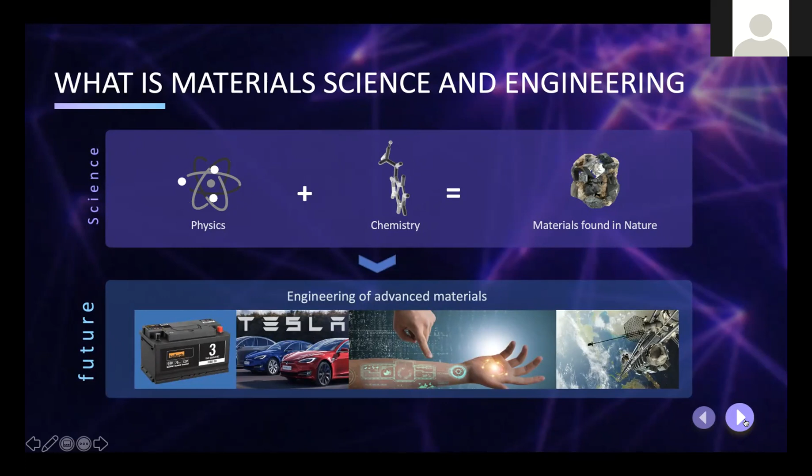In brief, in material science, we are interested in the processing of the materials, but of course, when we process the materials, the next step we should consider is the structure of the material that we produce. Then we use characterization techniques to study their properties and relate these properties to a given performance. That's what material science, in short, is trying to achieve.

For the next few years, what we are aiming for is to achieve flexible modules. Out of the entire curriculum, you have 25% meant for something that is unrestricted. What this means is that you are able to use about 10 modules to explore your own interests. It could be AI, computer science, or it could be business or economics. These are some highlights that we really want to showcase to all of you.

Okay, thanks, Vincent. Okay, yeah. Then I'll share my screen. Yeah, so let me just share my screen. And let's go in. So, okay, I hope everyone can see my screen.

So the outline of today's presentation. First of all, I'll just give a brief overview of what is 3DP. We think we know what is 3DP, but do we really know? And just what do we use it for? And what kind of materials actually are we using it with? This always surprises me. People seem to think that it's just plastics, but you'll be surprised.

So for this challenge, we'll be just starting you off with basically the most accessible 3D printing technique. So that's FDM, and then I'll just tell you about how FDM works in general. Actually, it's very simple, and then some design considerations, how you want to think when you are trying to print something. So what are the concerns?

And then finally, for the last part of this lecture, I'll be talking about Fusion 360, which is CAD software. Basically, I'll just be telling you where the buttons are. So learning where the buttons are is half the battle won. And then actually there is a simulation interface right within Fusion.

So even if you've never done finite element analysis, even if you're not a certified mechanical engineer, you can use simulation to help you in some manner. Of course, the more you know about it, the more you can do with it. But even for someone who is unfamiliar with FEA, you can be surprised what you are able to do with it. So what is 3DP?

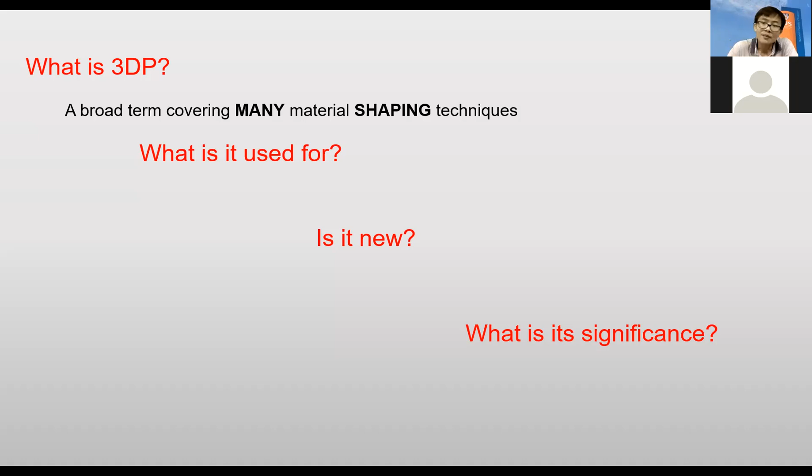So the original name for 3D printing, other than just this popular term of 3D printing, is actually rapid prototyping. So it used to be used for making prototypes. So what would my design look like, but it wasn't meant for actual use because they couldn't really make it in the material that they wanted. But nowadays, 3D printing has a new name that is more commonly used in the industry. It's actually called additive manufacturing.

And is it new? Well, actually the first 3D printing technique was invented in 1978, if I'm not wrong, by Chuck Hull. So it's actually SLA. Some of you might know it. Basically, it's another plastic printing technique. Yeah, so 1978. And I think within a few years, there was also metal printing. So metal printing existed since the 1980s, but only in the late 2000s do we begin to see some more action from 3D printing.

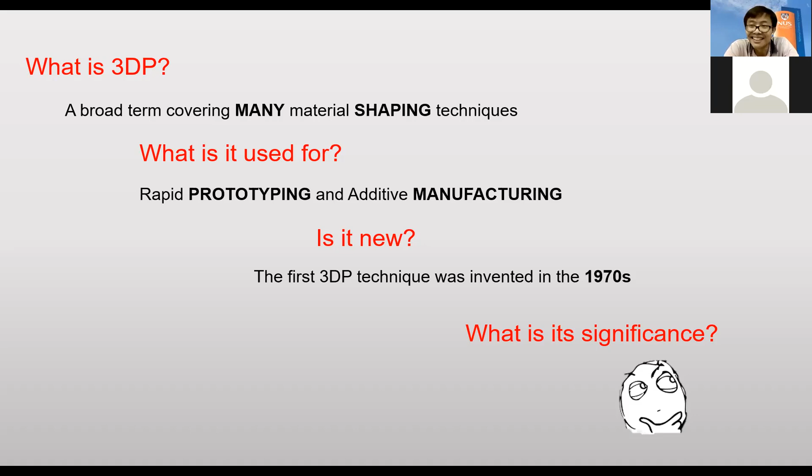But is 3D printing really that significant? Or is it just used for printing toys? This is something we have to think about. Before we go into anything, we need to always think about actually what's the use. But I'm glad I'm able to tell you that 3D printing is pretty significant. Maybe it's up for debate just how significant it is at the current moment, but I think it's undoubtedly something that will help humans advance technology in the next few decades.

So we all know that mankind relies on technologies to help shape and manipulate our environment. So actually the chair you're sitting on, maybe it's a Secretlab, maybe it's not. They're opening an R&D lab in Singapore as well. So even chairs require R&D, and chair materials also have their own tips and tricks that you need to know in order to make a good chair. Of course, whether the chair costs $700 is another issue, but it's what we can do to our surroundings that determines our technological level.

So there are material ages that some historians use to classify history. So first of all, there's the Stone Age. So we take stones, rock, in prehistory. They use it to make tools. Okay, flint, like flint stones. But after the Stone Age, what is the next age? The next age is actually the Bronze Age.

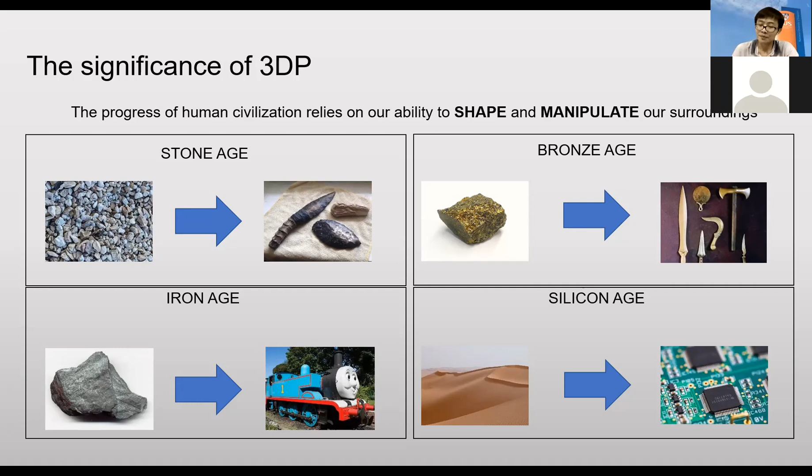But do you ever wonder why, when you walk out, things look the way they do? I just talked about shapes, right? But do you ever wonder why is it this shape? I mean, we walk past railings all the time, and of course, some of these railings are disinfected often, so you can hold it. But if you hold it, when railings have this kind of a joint, what do you notice about it? You'll notice that actually it isn't one piece.

Railings are often welded together. Then you'll be surprised. Even for a simple shape like a railing, we have to make it in multiple pieces. But why do we make it in multiple pieces? Well, it's because actually there is trouble making it in one single piece. And that's because we have a lot of trouble making shapes that we actually want to make, just due to the fact that material processing techniques, shaping techniques, are quite limited. Of course, we can do a lot of things, but they are still limited.

So, for example, the designer, after spending some time thinking about what you want to do, will come up with a wonderful design. Wow, it's so complicated. It's designed for function. This is exactly what you want. And then, you pass it to the engineer, and the engineer says, yeah, great, I can do it. And because traditional manufacturing takes some time, maybe after a few months, you finally get your product. And you get a product that maybe doesn't look like what you originally planned. Of course, this is a dramatization. The real engineering process doesn't work like this.

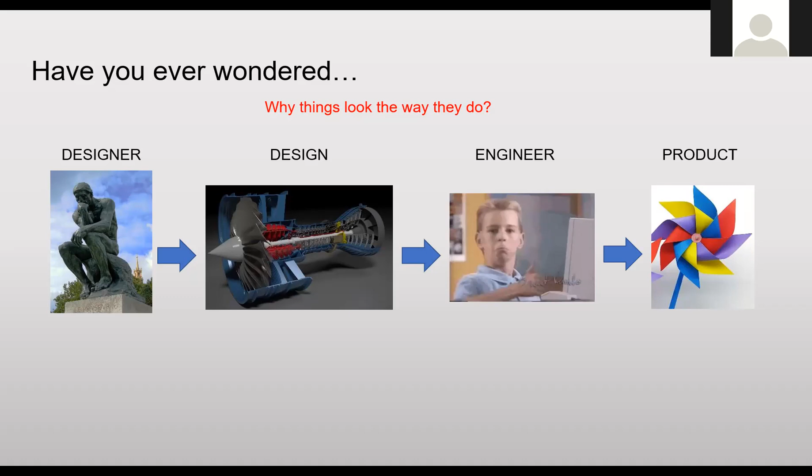But some of you might have heard of the term design for manufacturing. There's a long definition for it, definitely. Some of you might even know it. But actually, it's just all about telling you what not to do. That's because different manufacturing techniques have their limitations, geometries that they can make and cannot make. So design for manufacturing is actually all about trying to design the part for the manufacturing technique and not for the application that it's going to be used for. And that is where 3D printing brings a lot of value.

It's because 3D printing allows us to break away from design for manufacturing, and it gives us much, much more freedom to think about what shape we actually want to make for the application. So the here and now: most of you are probably quite young, but the 3D printing hype started when I was in undergrad, around 2015, when it became very hot.

So there were actually two waves of hype. The first wave was when people started to make very cheap plastic 3D printers, and hobbyists could buy them. That was in the early 2010s. Then people started thinking, well, the future is now. You can make whatever you want in the comfort of your home. But actually, the second wave of 3D printing, and what I would consider the more

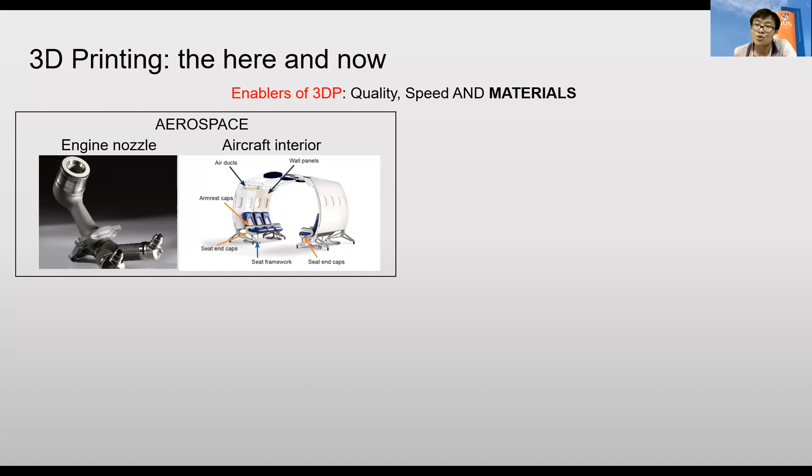Plastics, so aircraft interiors. These are some examples by the company 3D Systems. You can see all these air ducts, wall panels, armrest caps, things you might not even notice in the airplane, but they're all very important for your comfort and for the operation of the airplane, such as the seat framework. And 3D printing with engineering plastics has allowed aircraft to become lighter, and lighter aircraft require less fuel, and less fuel means a more sustainable business and of course a lower cost. That's why aerospace is actually the biggest driver of 3D printing. You really see a lot of value in it.

The second one, of course, is biomedical. And why biomedical? Because one beautiful thing about 3D printing is that you can make individualized parts for everyone and anyone, basically at no extra cost. Conventional manufacturing relies on making the same part tens of thousands of times, and that's where the cost savings come from. You make a mold, you make a single part, it's going to cost a lot. If I made 100 parts, the cost will drop. But if I made 1,000 parts, it's cheap.

But that's where the problem comes in. Conventional manufacturing is all about making tons and tons of parts, but these parts are not made to order. It's just the same design. I'm making this design and that's it. And think about the human body. I'm not sure about you, but when I go to buy my shirts or pants, I often can't find my size, or it's not bespoke, not well fitting. And if you think about the discomfort with pants, think about someone who has lost a limb, lost an arm, lost a leg.

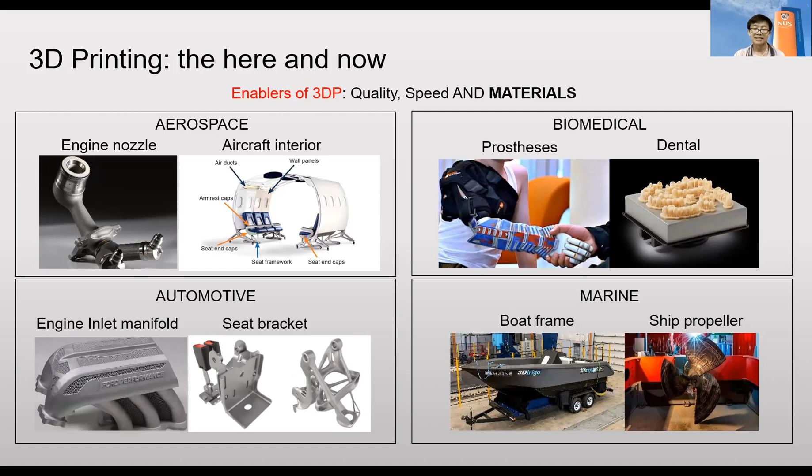And on the right-hand side, it's a ship propeller. It's made by wire arc additive manufacturing, or WAAM. It's actually a type of additive manufacturing technique that's used for repair. Sometimes ship propellers are damaged. In the old days, maybe they just scrapped the propeller. But nowadays with 3D printing, we can actually repair the part at lower cost and shorter time. So that's here and now.

But where can we start? Nowadays FDM printers are so cheap. I even have one at home. Okay, but for those of you who have not had the experience with 3D printing, FDM is really a good place to start because it has a lot of concepts built in that apply to other 3D printing techniques, and it's very accessible.

So FDM is also called fused deposition modeling. It's actually a trade name by Stratasys, the company who originally invented this. But of course, there are a lot of companies in China who are also making very cheap machines. I happen to own one. Other companies also come up with FDM printers, but sometimes they don't call it FDM because FDM is trademarked. Sometimes they call it FFF, or fused filament fabrication. Basically, it's the same thing. Name's different, but the idea is the same.

So what exactly is FDM? This is the machine that we're using for this 3D printing challenge. This is a Prusa i3 MK3S. And if you think about it, a 3D printer or FDM printer is actually very simple. If you go online, you can actually find the resources to build one yourself, not buy one, to build one from scratch.

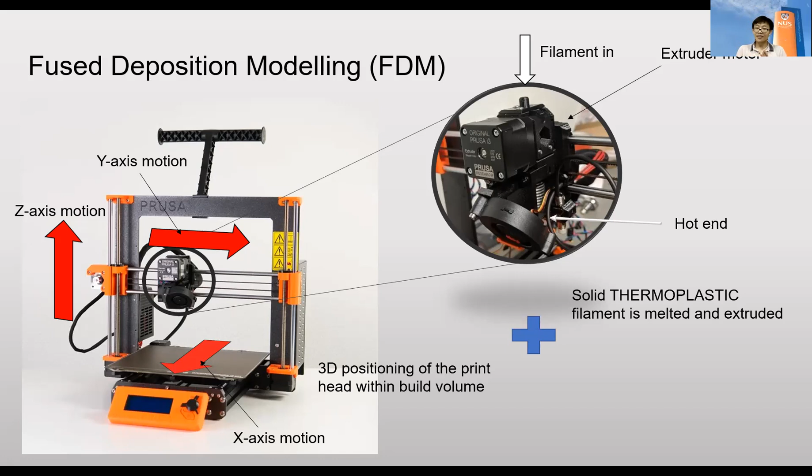So on one hand, we have 3D positioning of the printhead within the build volume, and we have solid thermoplastic filament that is being melted and extruded. And then we can get our 3D printed part.

So the materials for this challenge, it's plastics that melt. Okay, so we call these kinds of plastics thermoplastics. There are other kinds of polymers, so there are thermosets, UV curable types of polymers as well. So some of you might have already dabbled in 3D printing, and you might know things like SLA or MSLA or DLP printers. Those printers you can also get for yourself at very low cost, less than $500. Those use a light source to cure the plastic.

So you pour in resin, and then it's cured to become a solid by a UV light source. But of course, resin is quite messy and toxic to work with. Thermoplastics, on the other hand, you have filament. The filament is solid, and you load it on. It's nice, I guess. It's fuss-free. And among all these fuss-free polymers, there are 3 kinds that we'll be allowing you to use. So you have to pick from these 3.

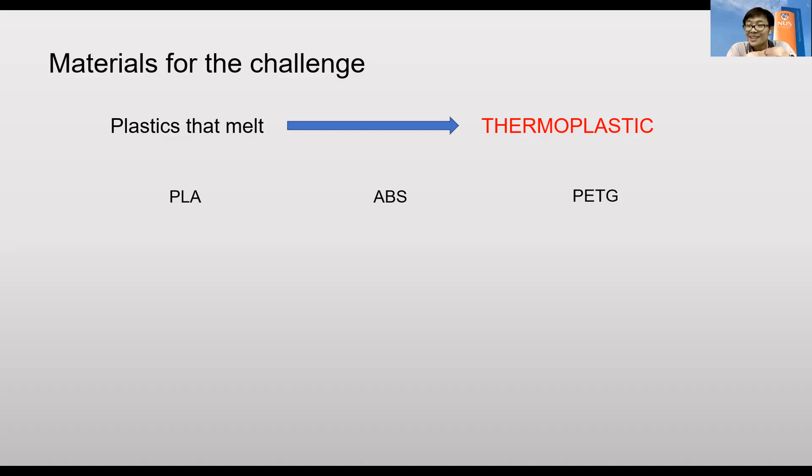So when you mail us your design, you have to tell us specifically what plastic you intend to print with. And all these plastics have their own different characteristics, different properties. So we have PLA, polylactic acid. We have ABS. I forgot the name for it, but it's the short form of ABS. There's also PETG. You might be familiar with PET. Most of your Dasani bottles, your mineral water bottles, are made from PET. So PETG is just a type of PET.

So when you think about what plastics to use, it's dependent on our design. The design requirements, how strong should it be? What is my part supposed to do? It will affect the material choice. And what material you have available to you will affect how you can design the part.

Some of you might already know, there are flexible filaments. So there are plastics that we can print that are very rubber-like. But on purpose, we are not allowing you to use these rubber-type flexible filaments for a very simple reason, just because those materials are very well suited for this particular challenge. And if we allowed you to use them, basically everyone would use them. Then there's no fun, right?

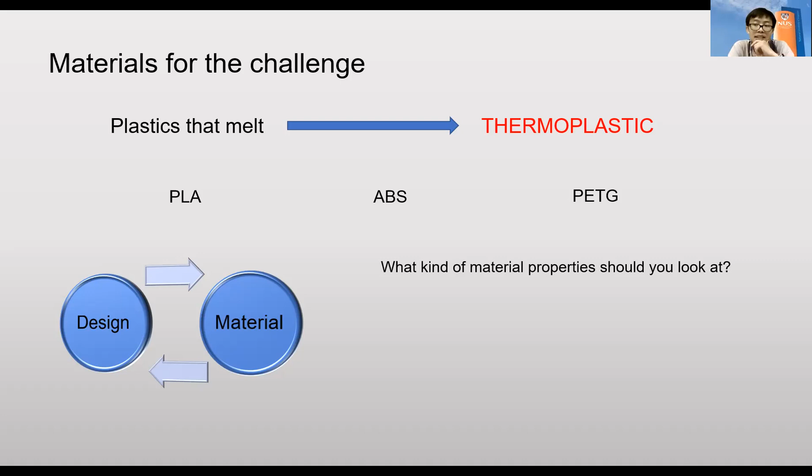But it's not to say that rigid polymers can't do the job. Of course, if I allowed you to print with a rubbery polymer, definitely you would be able to survive much greater heights. But what can we do to maximize what we have? We don't always have the materials that we want, and that is true even in industry. But how do we work with what we have? So what kind of material properties do we look at?

So the most obvious ones, of course, are stiffness and strength. For the material science students among us, we might know that stiffness and strength are 2 different properties. But some of you might be guilty of using stiffness and strength interchangeably sometimes when you describe something. So for example, let's say I'm trying to break this pen, and it's very strong, I'll say it's very stiff. Am I right to say that?

What is stiffness? Stiffness is how much a material can deform elastically. When I say elastically, I mean that it's not supposed to fail plastically. It's not supposed to change shape permanently. So stiffness just means how much force is required to deform a material, but it can still go back to its own shape.

What about strength? Strength is how much force you need to use in order to deform the material permanently, or plastically. So the ultimate tensile strength of a material, for many materials, is basically the highest strength that you will experience as you deform the part. But those two are two different things. If you don't expect your part to fail, then you shouldn't be too concerned about the strength.

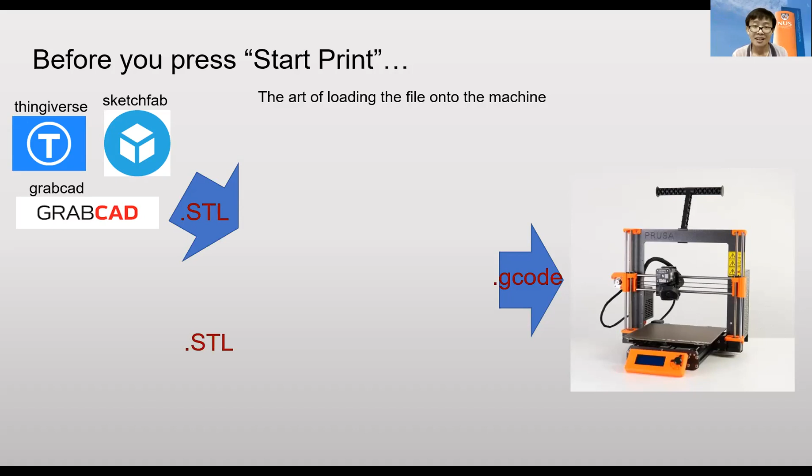There are many good and interesting designs posted online. And I would highly encourage all the teams to go online and just do a quick search, look at what's out there and try to see how you can improve it. So from the STL, we can't print it because we need a G-code, right? So we need to convert the STL to G-code. So we need a slicing software.

But other than just downloading the files of other people, what about your own creativity? You can turn your own creativity into STL files by using software such as SolidWorks or Fusion 360 or even Blender. Some of you might have experience with Blender, since Blender is free. Fusion 360 is also free.

Of course, we already told you to download it. The education license is free and has most of the functionality. In fact, all the functionality, to my knowledge. SolidWorks, you need to pay for. Okay.

So slicing your print is important. I think we also told all of you to download PrusaSlicer or Cura. PrusaSlicer is the slicer that we'll be using for the challenge. But Cura is also compatible with almost every 3D printer out there. So at home, I use Cura.

And why do we want you to download the slicer if you're not doing the printing? It's important because as part of the rules, we have a material limit for you to abide by. I think Vincent might have mentioned it, it might have been in the details of the challenge. If not, we'll clarify later. So you are supposed to use a limited amount of material for your design. You can't just make something that is outrageously large or outrageously heavy.

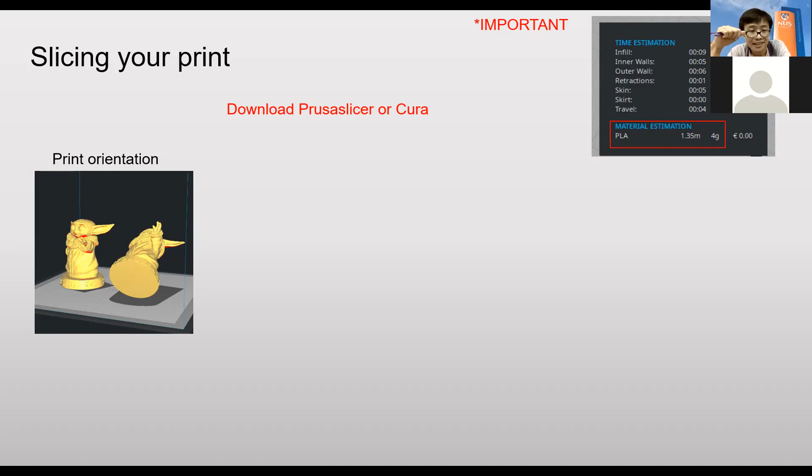And when you choose your print orientation, what do you have to think about? You have to think about how to arrange your print to maximize print success. Like I said, the print can fail. If the red parts are not supported, it might fail. And at the same time, there are certain orientations that can allow you to decrease the amount of material that you need for supports.

And how do you know it? Actually, in your case, if you just work with Prusa Slicer and Cura, you have to do it manually. So it's by experience and by trial and error. There is software out there that can actually help you, through some machine learning algorithm, optimize your print, like how to minimize the support material. Also, if it's possible, you can try to minimize print time. That's for my sake, okay?

And also, 3D printed parts are not isotropic. This means that they don't behave the same way in all three different directions. I just talked about the X, Y, Z axes. 3D printed parts don't behave in the same way, usually between the X, Y directions and the Z direction. This is something called anisotropy. But if you think about it, if I want my part to work in a certain way, how should I print it? If I print it one way, it might be weaker than if I printed it the other way. So something for you to think about.

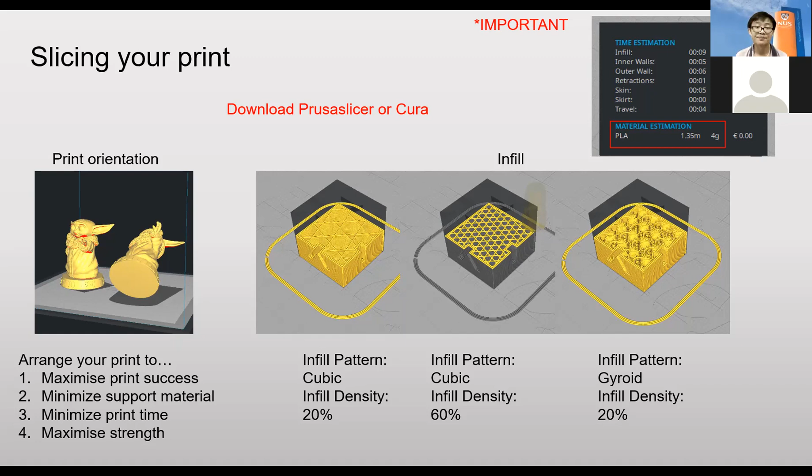But before we go into modeling, which is actually the meat of the lecture, let us think about what we have to think about in terms of printing. So like I just said, support and infill, right? Other than those two, let's go into support again because it's very important. So supports, think about how much support do you need? And think about whether your support material can be removed.

For example, if I have a triangle shape and this is my part, all the blue lines are support material. You can see that I will not be able to reach into the triangle to remove your support. If I can't remove the support, then should we be placing it in the first place? And look at the side, there is simply too much support all along the sides. If I flipped this triangle upside down, you realize that I wouldn't even need any supports, right? So these are questions for you to think about and for you to learn.

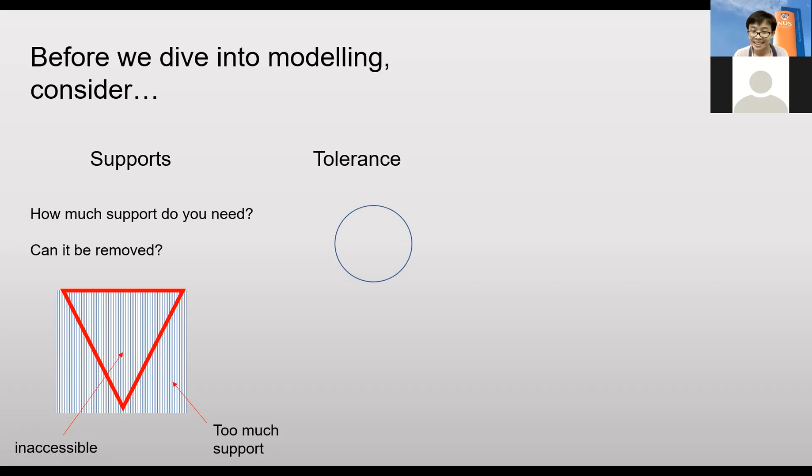Other than that, we have tolerance. So what about tolerance? What is tolerance? Tolerance, for our sake, let's imagine we have a hole of a certain size. We want to fit something in. So how small should the gap between my inner and outer part be? And can I fit my part into the hole?

For this challenge, 0.3 mm is the smallest gap you can go, but 0.5 mm is fine. What this means is that if you have two parts that are supposed to fit together, if your inner diameter for the outer part is 5 mm, there should be a gap of at least 0.3 mm between the inner and outer parts. If your inner diameter is 5 mm and the part you're going to put in is also 5 mm, it's not going to fit in. And if it doesn't fit in, it's going to be difficult for us to even assemble your print. So this is very, very important.

And for the challenge, every single part of your model must be 3D printed. This includes the locking mechanism. How are you going to put the egg into your 3D printed egg sleeve? If you put it in, can it remain closed? If you just have two parts and you put the egg in, you close it and I drop it, if the egg falls out immediately, then there's no point, right? You have to think about how you're going to keep the egg inside your part. And this design must be 3D printed.

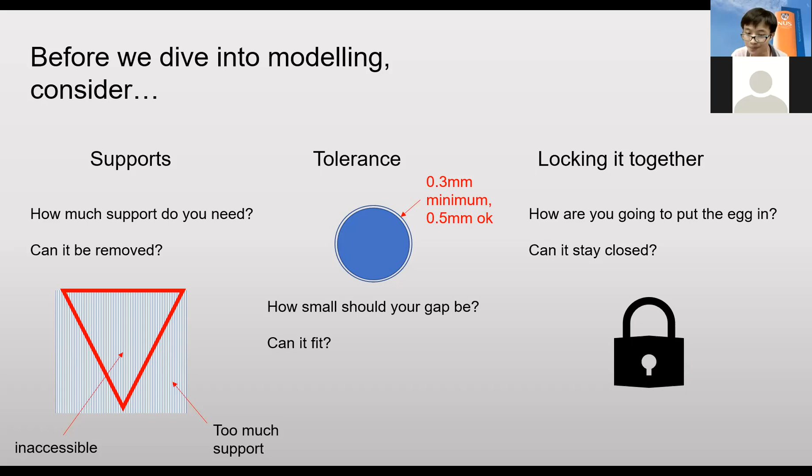So now, Fusion 360. I hope that after this challenge, some of you will go on to learn to use Fusion 360 even more, and maybe even learn to like it, because I did. Sometimes just downloading models is just not fun. You need to do something by yourself. So I hope that you've already downloaded it. Some of you might already have experience with it.

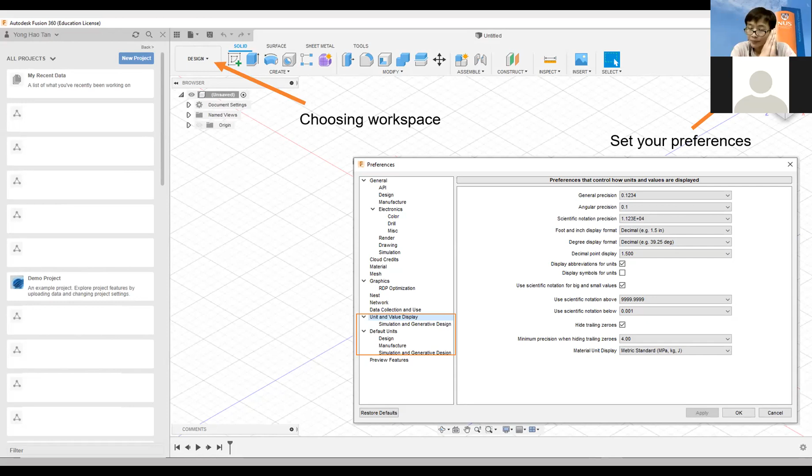So for our case, we are using metric standard. Also, there are default units, because you can set your units to inches, but we are in Singapore, so we use SI units. And of course, Fusion 360 is not just a design software. There are many workspaces in it. The default is design, but you can always choose different workspaces, and in different workspaces there are different functionalities that I will touch on later.

So the first step of drawing something is sketching. CAD software is based on making something 2D first, and then taking that 2D and translating it into 3D. But some of you might not be able to draw. So how? Personally, I couldn't draw to save my own life, I'll be honest. But thanks to computers, we have some tricks that we can play. So some simple steps to get us started: use a lot of references.

And how do you use references? You can always import a canvas image. The first step is to create a sketch plane onto the canvas image, so you can sketch out what you want. Later, I'll demonstrate this. And to continue to learn how to sketch, we need to learn about the basic tools that we have, and the tools that let us draw less. 3D modeling is all about being lazy. Need to be as lazy as possible. So things like projecting shapes. If the shape is already there, can you just project it rather than draw it again? Yes, you can.

But importantly, for 3D CAD modeling, we need to learn how to draw precisely. If a part is supposed to be 10 mm long, it must be exactly 10 mm long. If I have two lines that are supposed to touch at a right angle, they must touch, and it must be at right angles. So these are constraints. So I'll just demonstrate now. I will go into Fusion 360. I hope you can still see this.

Let's say we have discussed how to design the egg sleeve, and someone in our team sketched out an egg sleeve. We can import that image into Fusion 360 to do our 3D sketching. So I'll just insert canvas. In this case, you can always insert from your computer. But for this sharing, I have created my default project, and I have included this image. So this is a TIE fighter.

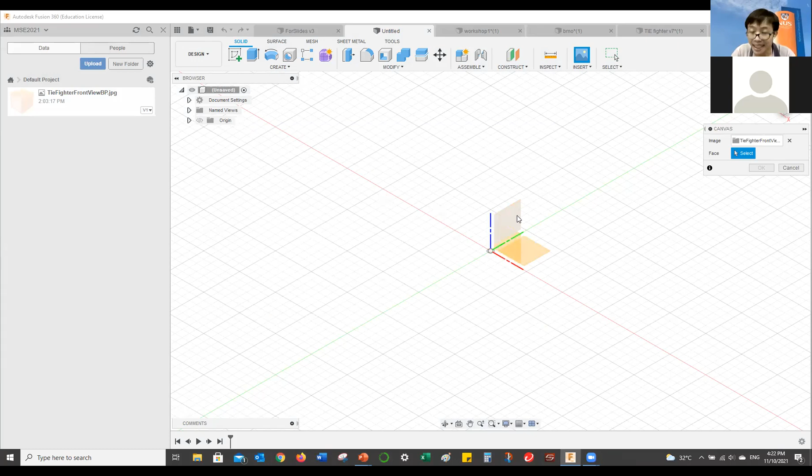So I just select my plane. You can see that there are a few planes you can select, so decide where you want your sketch to face. So you import the canvas. I've imported my canvas. You can use the cube at the right-hand corner to navigate. If I click front, suddenly my view orientates to the front. You can zoom in with your mouse wheel. So you can see that this is a TIE fighter,

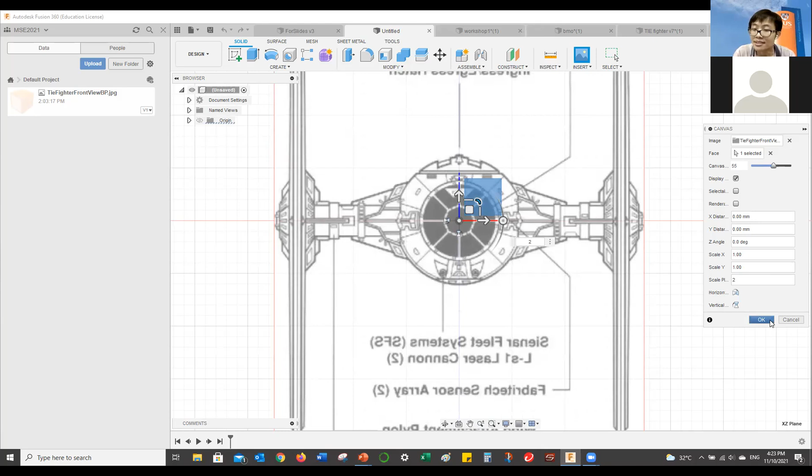and you can scale the TIE fighter up or down. You can also set it to be a specific scale. There are also things like the canvas opacity. You can make it slightly transparent. In this case, by default, it's 50%. I can make it 100%. Okay, 50%. So once you have this, you can start sketching. And how do you sketch?

The basic of a sketch is deciding where you want to sketch. So first of all, create sketch. This is the first button beside your design workspace. Click it. You notice that it tells you that you can select these 3 planes currently. Let's say I want to select this plane. And now I'm in the sketching workspace. So what tools do I have? I can draw simple lines.

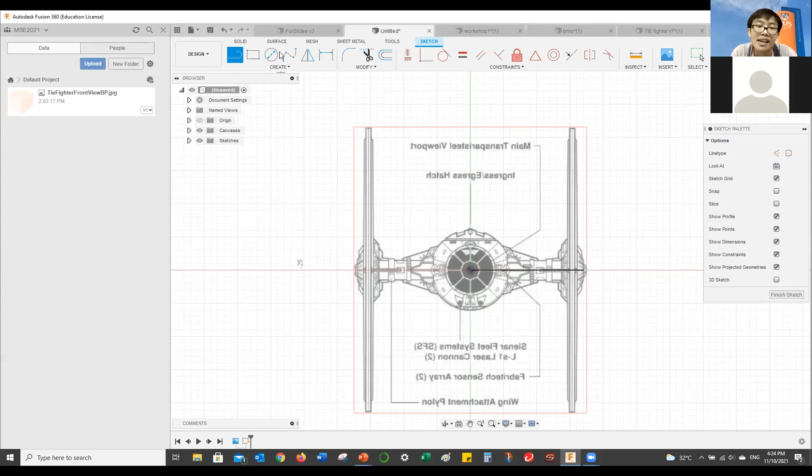I can also draw rectangles. Okay, I hope you can see my rectangle. I can also draw circles. Okay, and I want you to know that there are different types of shapes that you can draw. Under the create, you can see that line is very simple.

There's only one function. But even for drawing rectangles, there are different functions you can have. You can have a 2-point rectangle, so you only have to select 2 points, a 3-point rectangle, or a center rectangle. For a circle, you can have a center circle, which is the default like I just did, or 2-point circle, or 3-point circle. So there are many, many ways for you to draw.

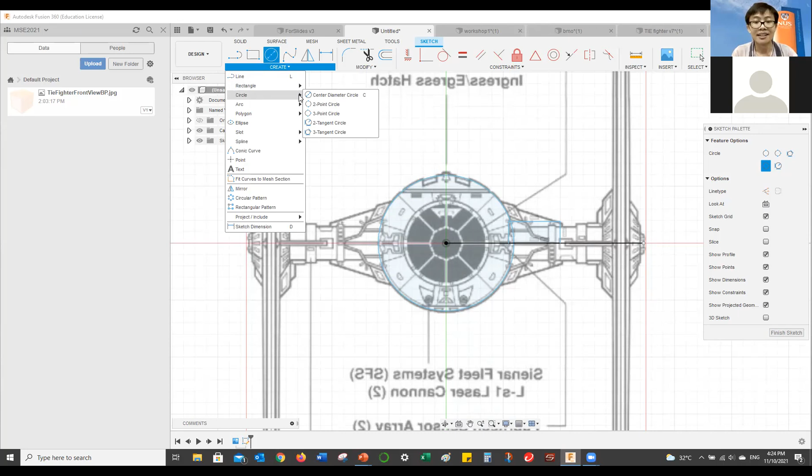And what did I say about drawing less? For example, I have my rectangle here. Do you see that this TIE fighter is symmetric? If it's symmetric, do I have to draw both sides? The answer is no. I would suggest for you to never draw both sides. If your part is symmetric, always only draw one side.

That's because if you draw both sides, maybe you might not draw it perfectly and it won't be perfectly symmetric. Will it be important that it's not symmetric? Maybe, maybe not. So if I don't want to draw both sides, what can I do? There's a mirror function. I select my mirror function. I select my objects. The line here, 1, 2, 3, 4.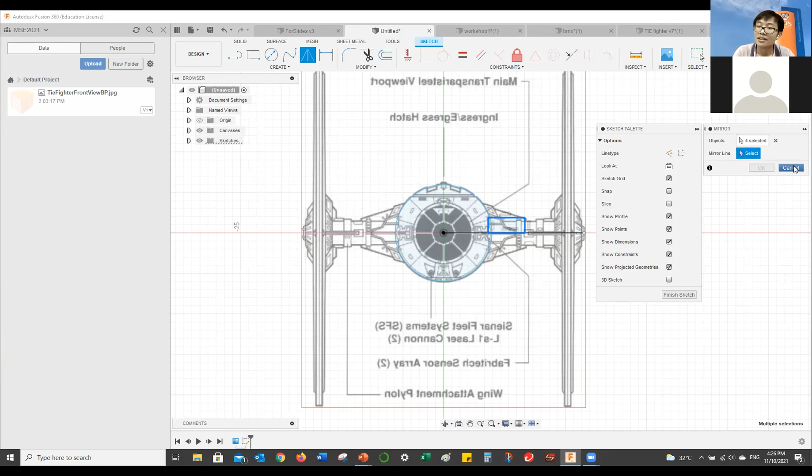Select my mirror line. But you realize, hey, there's nothing for you to select. So to draw a mirror line, just press L, which is the hotkey for line, and just draw a line down the middle. But let's say I only want to use this line to mirror my objects across, but I don't want it to be part of my actual design.

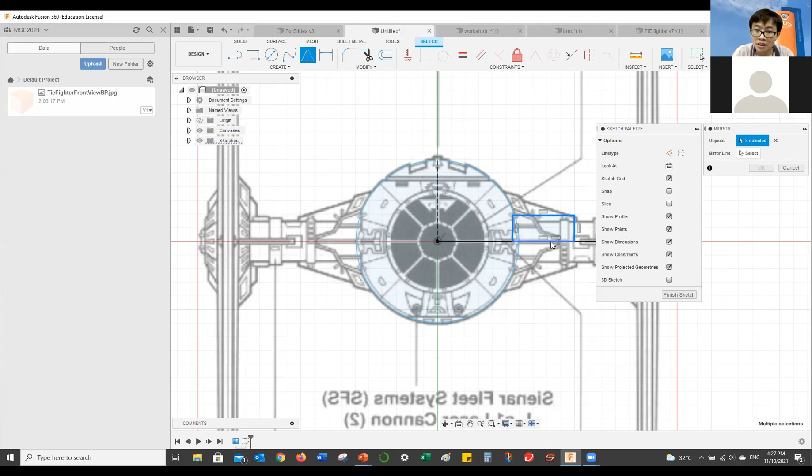What can I do? Select the line, press X. This makes it a construction line, so it's only used for references, but not part of the actual design. And now I can just click mirror. And then I select my mirror line in the middle. One, two, three. Do you see that now I have my rectangle mirrored onto the other side?

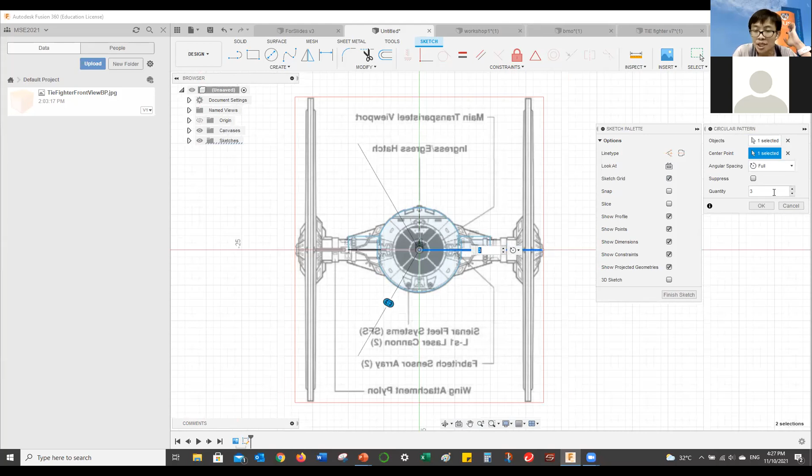So these are basically simple drawing tools you can have, and not just mirroring. For example, if I wanted rectangles on the top and bottom, what can I do? You can just create circular pattern. Let's say I don't want my rectangle, I want this line. Select the line, click the center point, the one in the middle, and you see that now the default is 3 lines. So 1, 2, 3.

Increase 1, 2, 3, 4. So it's up to you what you want to do. You can even control what angle you want to pattern it by. So all these are the basic sketching tools. But what did I say about drawing precisely?

For example, you can see that there's a constraints tab here. So if I wanted my point to touch this line, you can see that when I mouse over, there's already a constraint here. This constraint tells me that this point is directly touching the line. If I remove the constraint, press the constraint and press delete. And now I can move this point all around.

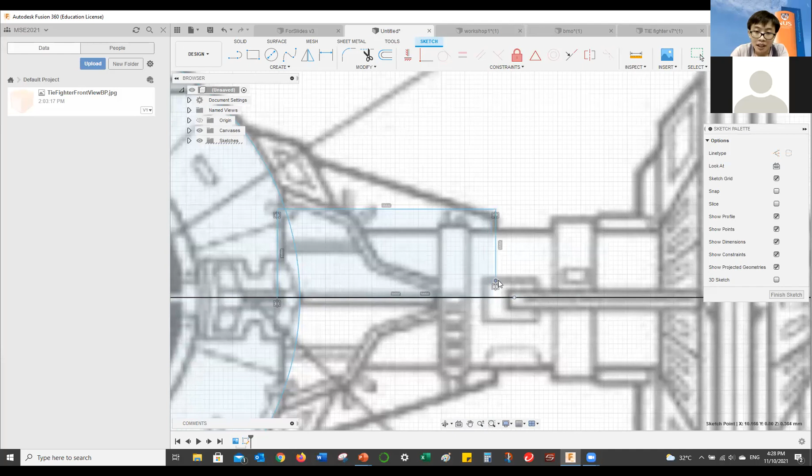Let's say I zoom in, zoom in, and I put it very close, but not touching. And you realize I have a problem. You'll not be able to make anything solid out of this part. That's because, you see, this is not touching. But how do you make it touch?

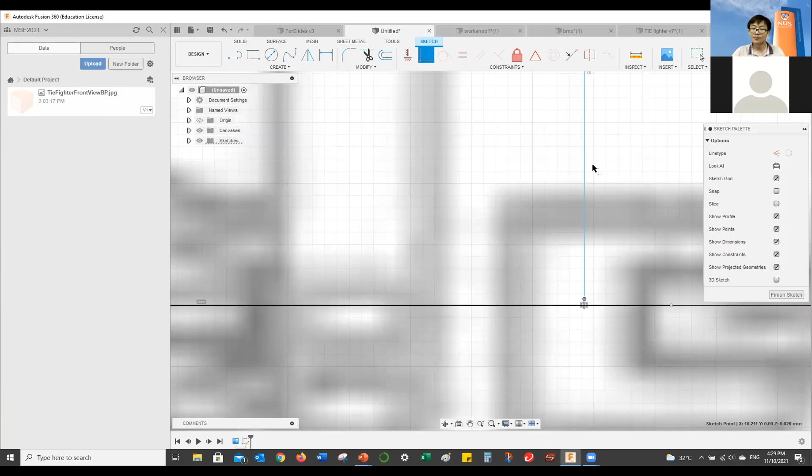So in case you made a mistake early on in your drawing and it's not precise enough, you can make it precise. I can click this line, click coincident, and I can click this. And you can see that now automatically it touches the line. And now you can see that this becomes shaded because this is now enclosed. So these are just some basic constraints.

So let's say once you are done sketching. Of course I don't expect to go through all the sketching tools with you in a few minutes. But this is just a quick warm up. So what can you do in the sketch workspace?

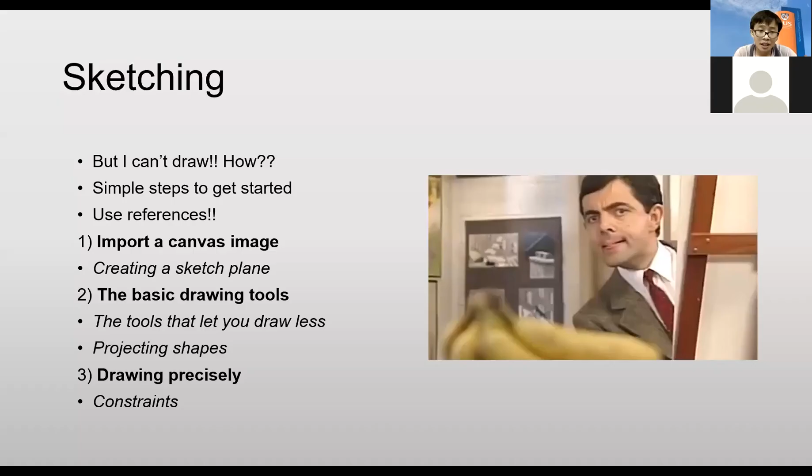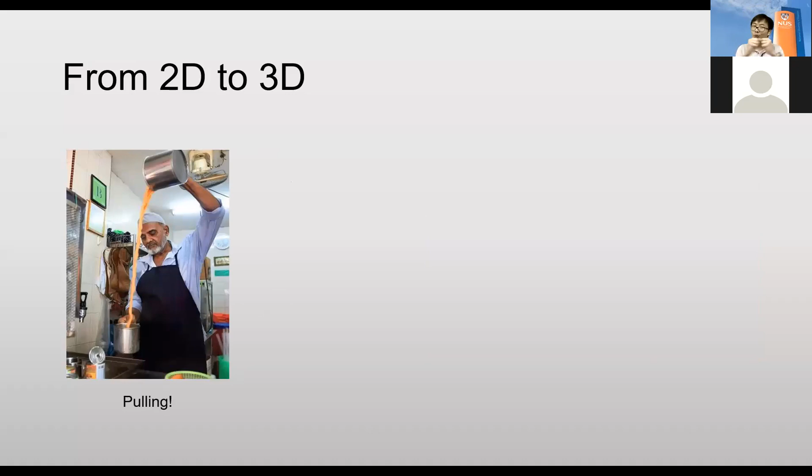But I want to make 3D CAD drawings, not 2D sketches. So how do we take something that's 2D and make it into 3D? Of course, you can pull the part. If it's 2D, you can pull it to make it 3D. You can also spin it and revolve it, okay? Of course, it's just about finding the right buttons to click. It's as simple as that. So let me demonstrate.

Let me go back to my sketch. Let me now draw a line. So how do I pull something? You can see that I can select this area. So I select it and I just press extrude. Okay. And then you can pull it and now it's a 3D part.

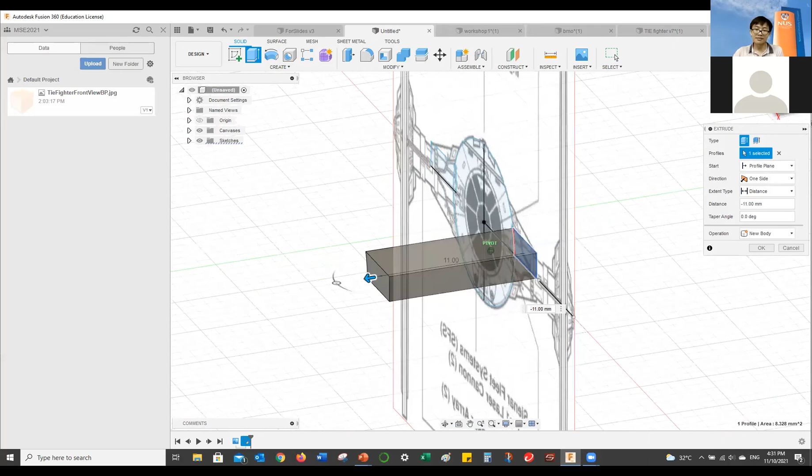Okay. What if I want to pull it on both sides? Very easy. Select the direction. Select two sides. Now you can pull it on both sides. Let's make it simple. Okay, one side. Let's say I don't want to keep it the same shape as I'm pulling it out. I want to make it smaller or make it bigger. Up to you. But how do you do it?

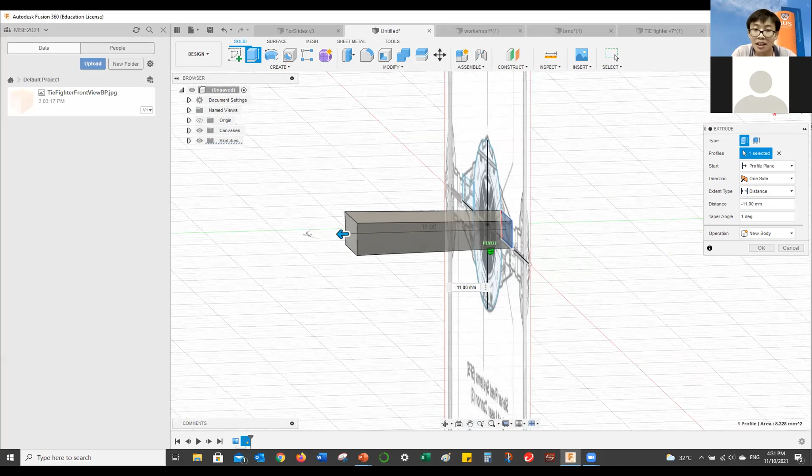Very easy. Go to taper angle. For example, if I give it 1 degree, you can see that now it is slightly bigger. Maybe to make it more exaggerated, make it 5 degrees. Okay, anytime you click enter, you are done with the modification.

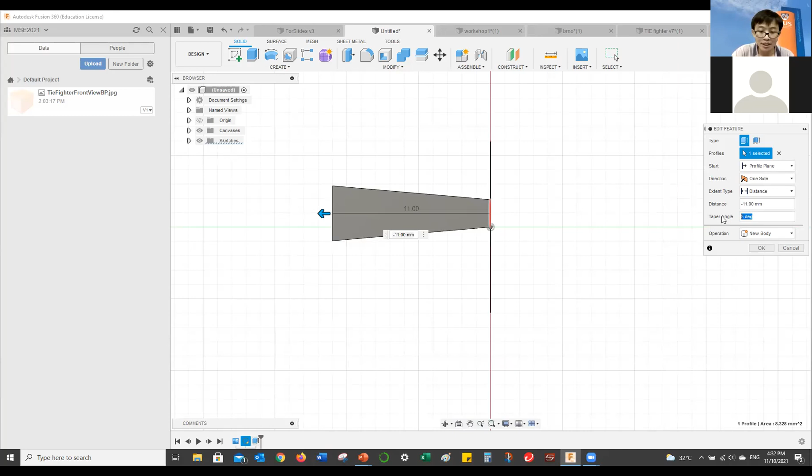But if you wanted to go and change it again, you can always go down to your parametric design timeline at the bottom of the screen and double click the feature. For example, you see extrude 1 at the bottom of my screen. I double click and I'll go back to the step where I was just now. And I can just change this if I wanted to make it smaller, -5, and now it's tiny, -1. And create a new body. Okay. So this is pulling.

What about spinning? So if I wanted to make a sphere, of course, there are many ways to make a sphere. I can even make a sphere directly from here, okay? But let's say I want to do it the manual way. How do I do it? Now you realize that my sketch is gone. That's because I extruded something out.

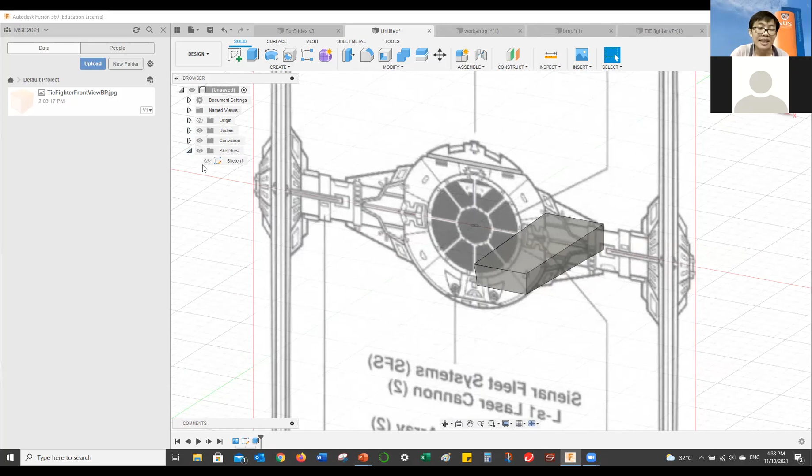But nothing is ever lost in Fusion 360. You can always find it. You can either find it here in your browser or below in the parametric design timeline. Click the sketch and you can see that now if I click the eyeball button, my sketch comes back.

Okay. So if I press E, E is the shortcut for extrude, which is the action that I did just now. If I press E now, I realize that I can't make a sphere. I can only make a tube. That's because you can't make a sphere by pulling something. But you actually can, just not pulling it outwards.

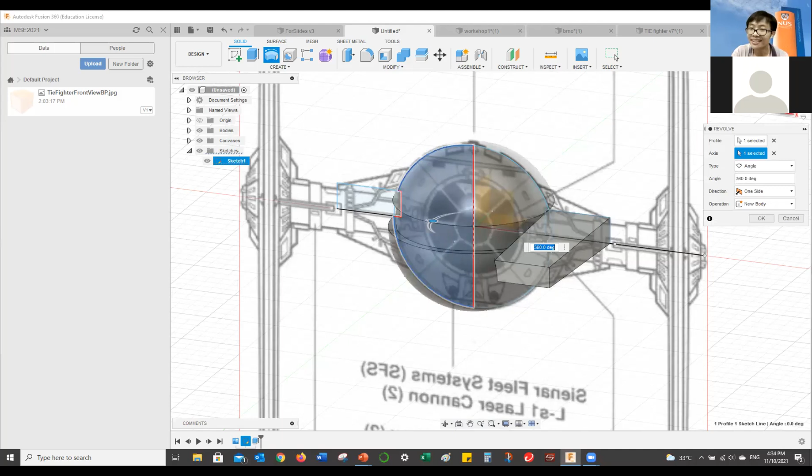So to make a sphere, I can use the revolve tool. You can just select this face, then select the axis where you want to turn it around. And then you can see now you have revolved and created a sphere.

Okay, I didn't select this part. But like I said, you can always go back and double click this. And now if I select this, you can see I have a perfect sphere. It's just about finding the right buttons to press. There are many functions here, such as extrude, revolve, sweep. Okay, I will demonstrate loft.

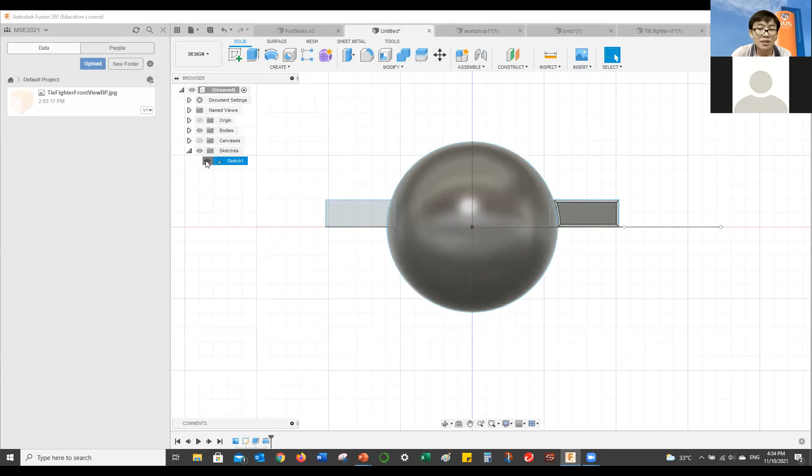So if I close this sketch and I make these bodies invisible, if I create a new sketch here, I make a rectangle. Okay, you can sketch in more than just 3 planes. Just now we could only see these 3 planes, but you can create new planes. You can construct an offset plane. So I select this plane, pull it up, and now I have a new plane. Click OK.

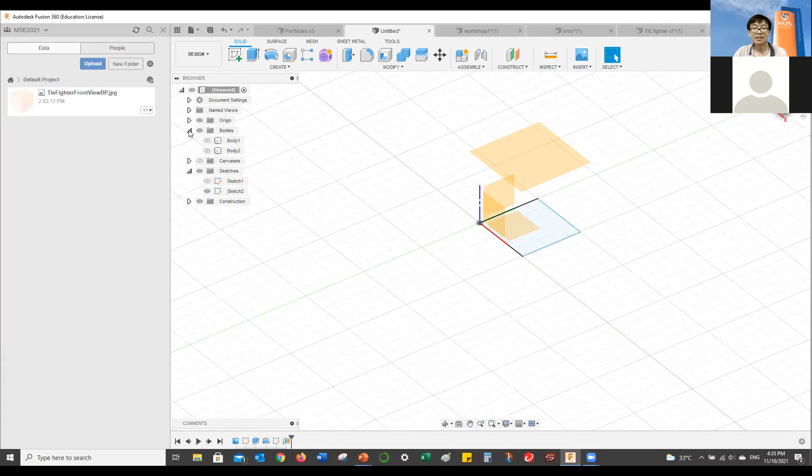And let's say on this sketch I want to create a circle. Finish sketch. Now I want to create this part. There is a square at the bottom and a circle at the top. How do I do it? If I pull this circle, I'll just get a cylinder. And the same thing for the square.

But there is a loft tool, so I can click this profile and click this profile. And you can see now I have this part that I want. Click OK. So there are many tools for you to experiment with.

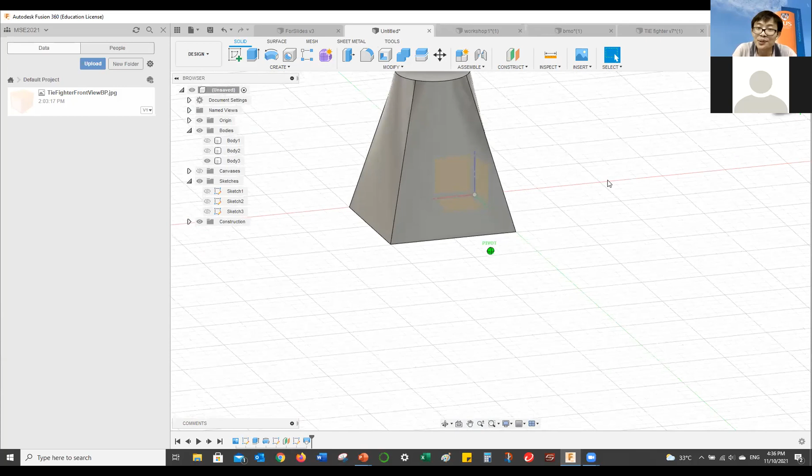And you can create many, many different things just with very simple tools. Now, let's say I've created my parts. We can do something called body modification, because that's what 3D CAD is all about. It's not just about drawing something in 2D and making it 3D. You can modify the 3D body that you just created.

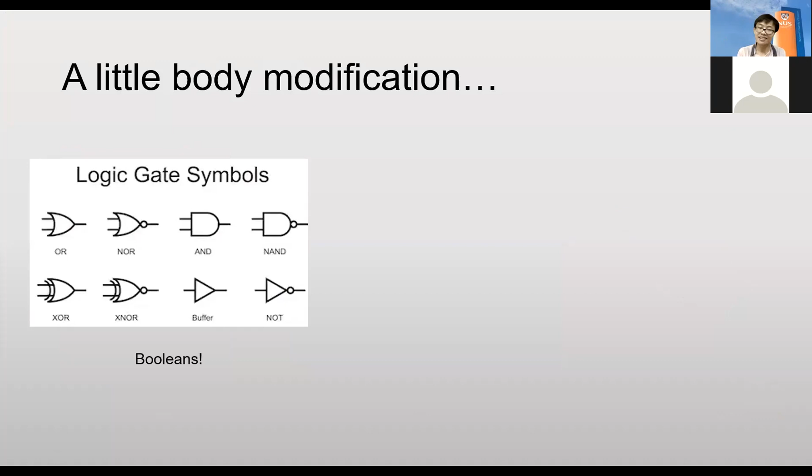So we can do things such as booleans. Booleans are basically like logic: it's either plus, minus, or intersect. And of course, you can fillet it, and you can shell the part. So let me just go through one by one what I'm talking about.

So let's say I wanted to cut away some part from this weird shape that I just created. So I select Modify. You can see that there's this Combine tool. It performs Boolean operations, but it doesn't just combine. You can choose to either join, cut, or intersect.

So my target is this body. My tool that I'm going to cut it with, let's change to another one. Let's just use this. No, I can't. Let's just use the sphere. And now if I click Join, you can see that this is now one part.

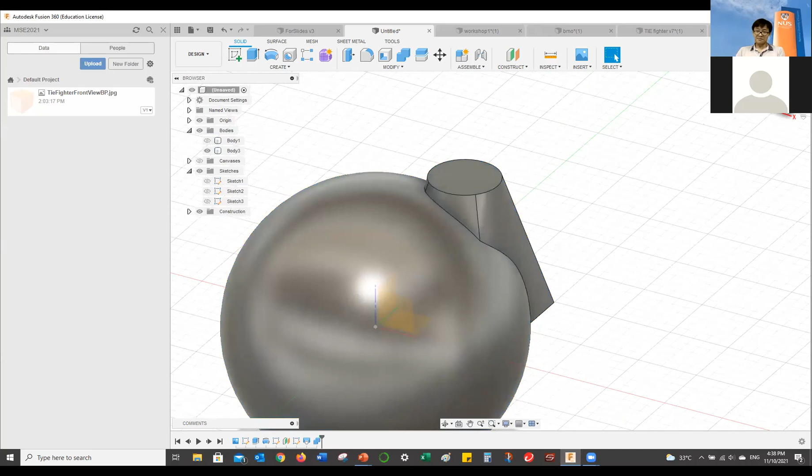But if I wanted to cut it, I didn't want to join it, I made a mistake. What do I do? Like I said, you can always go back and change your option. So if I click Cut, now I've cut this part. And now you can have this weird shape that maybe you could never have done otherwise.

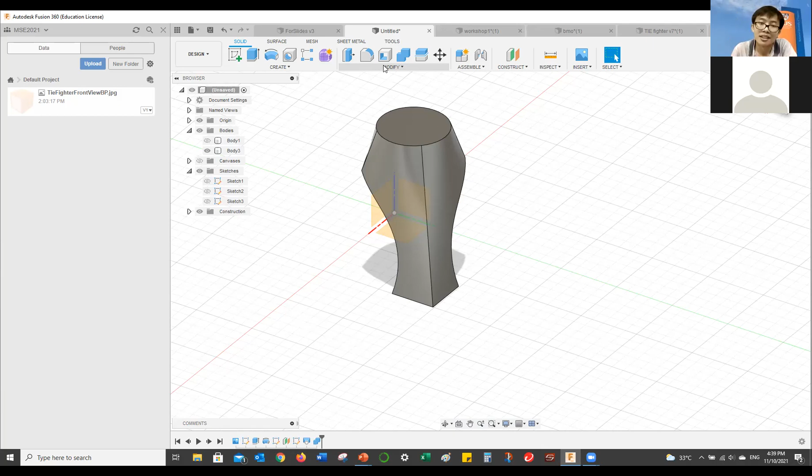So what did I say about fillet? Sometimes you don't want sharp edges in your actual part, because sharp edges are places of stress concentration. They might cause extra stress on your egg or on your part. So what can we do to take away sharp edges? There are two ways industry uses to take away sharp edges: you can either fillet or chamfer.

Now let me just demonstrate what the chamfer is, which is very simple. I click the edge that I don't want. This edge is sharp and I don't want it. I can just chamfer it. Chamfering cuts away the sharp edge and makes it a flat plane. I hope you can see. I can make it more obvious. Okay, this is chamfering.

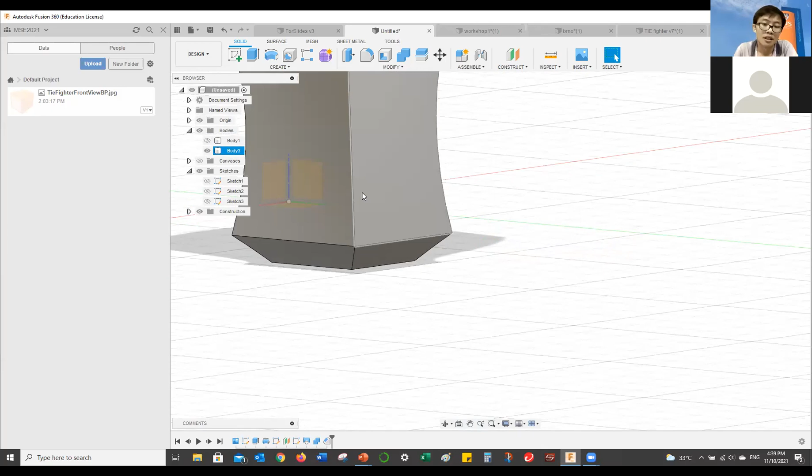Let's say I don't want to chamfer it. I can fillet it. So what's a fillet? Let's say I have this sharp edge here, which is also a stress concentration. I can fillet this edge. Do you see? This edge is no longer sharp, it's now smooth. So this is called a fillet. It just takes a sharp edge and rounds it. So these are just two things you can do.

And what did I say about shelling? Let's say I want to make a container or a cup, or maybe even an egg sleeve. What can I do? I can make it a shell, so you remove the material from the part. First of all, I select my body, which is this body. And of course, I select the face. So select this face.

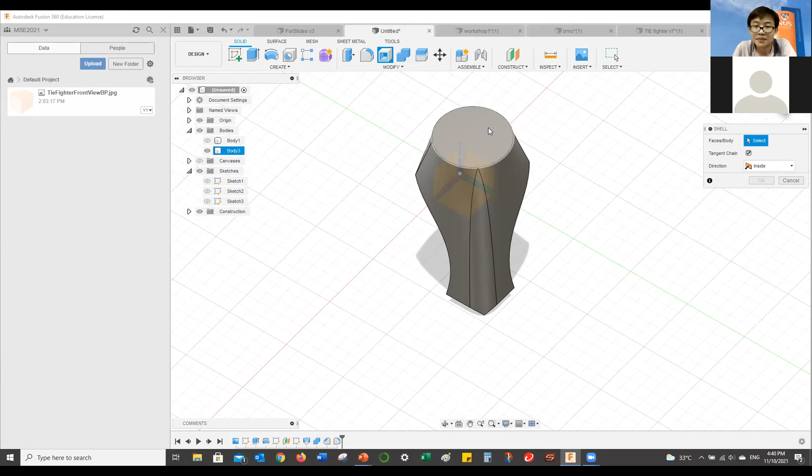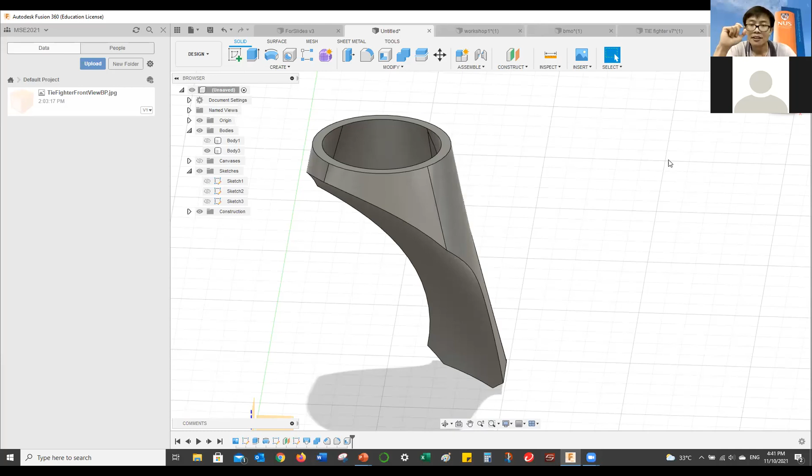And I can just shell it. And now you have a cup of sorts. This part looks solid, but the interior has now been hollowed out. So these are all the different things that you can do for your part: 3D modification. And just using all these simple tools, you can build something complicated from something simple.

So I hope that you remember my canvas just now. I imported this TIE fighter. Just by using the tools that I just shared with you, you can make something that is complicated. This is something that I drew. So never overthink things. You can always make something complicated by piecing together simple things one by one. This is quite important.

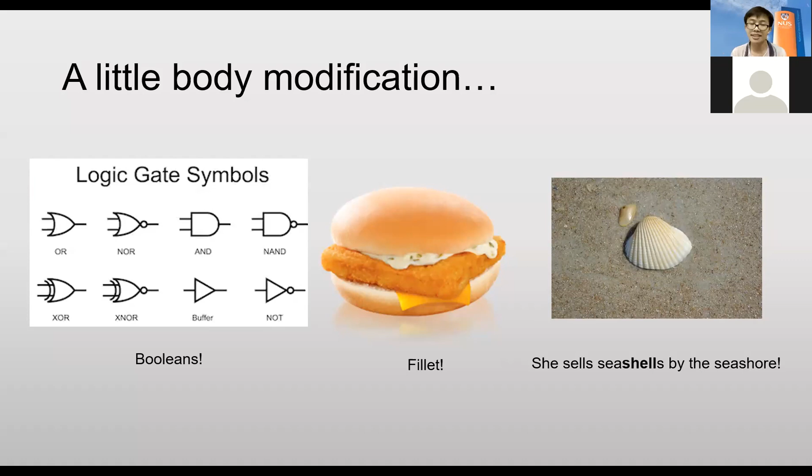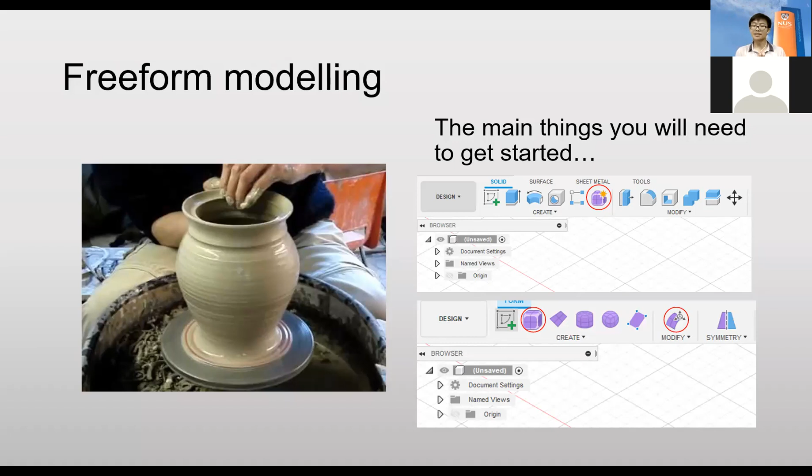Let me hide my canvas, hide this body. Do you see this purple cube? You can create a form. Let me just select a box, and I select this face. Let me just draw a box here. So now I can create this box. Okay, click OK. And now with this box, what I can do, I can modify this box.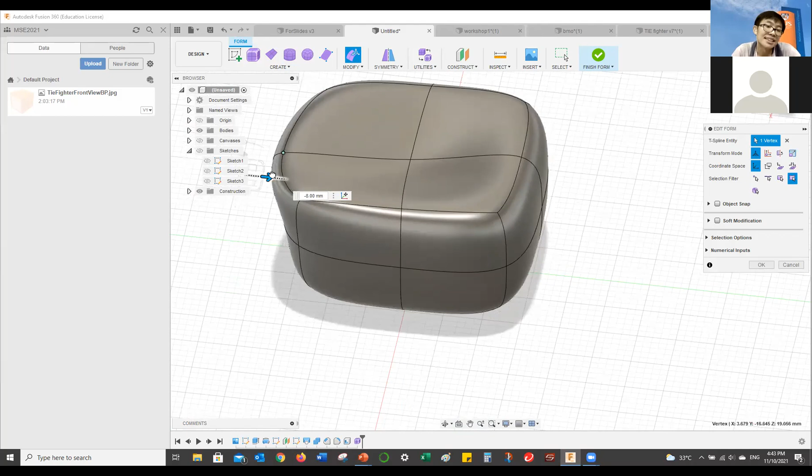I can click this point, way down, click this, can move it this side. No, it's basically like plasticine. You can shape it however you want, and not just points. You can click faces. I can pull it out. I can even scale or rotate the face.

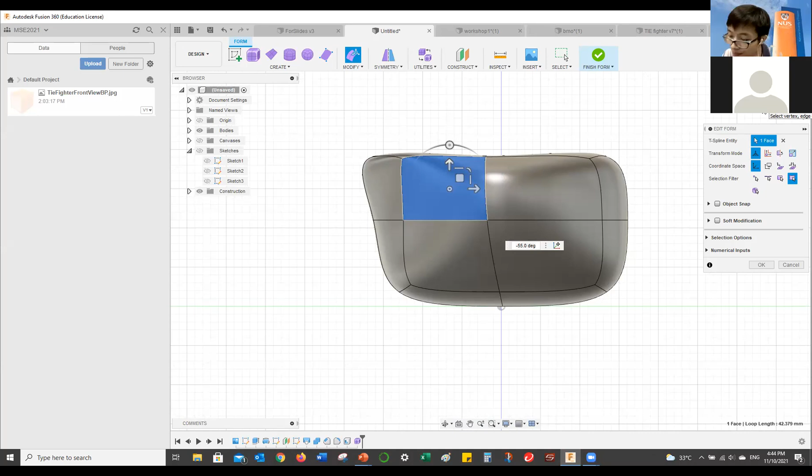Okay, so there are things that you can do to create new shapes. This might not be very precise shapes, but not all shapes need to be precise. But you need to know what you want it for. And if you find trouble in drawing 3D shapes, you can start off by modeling something in freeform first to provide yourself a reference. So now that you are done, let me finish my form.

You need to export your model because the Fusion file is not STL and I can't print your Fusion file. So I need to save as mesh. Under the bodies, in the browser, if you right click it, you can see this option, save as mesh. Click that, and you can see that now this window pops up. I would like you to select either STL binary or STL ASCII. Okay, either is fine. 3MF is a new file type, but let's just stick with what we know as a demonstration.

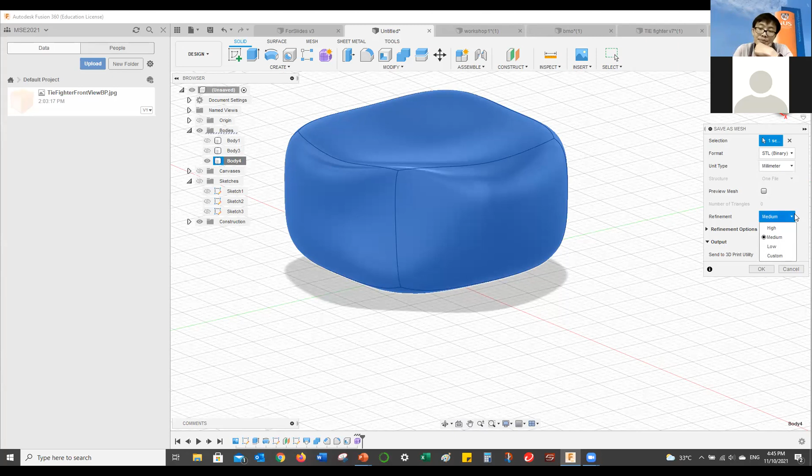Click Body4, right click, save as mesh. Okay, and STL binary. And then I can just save it to my computer. And that'll be all. Refinement, medium usually works. Unless you have many small fine features, then maybe you need to go high. But from my experience, medium is fine. So that's basically it for modeling.

But like what Vincent shared, nowadays we have so many tools at our disposal. Beyond just modeling, we have the ability to think about how our model performs. So you can do FEA in Fusion 360. It's really like a calculator, okay? Just a slightly more complicated calculator. So there is a native simulation capability in Fusion. First of all, you have to save your file. And after saving your file, just go to the workspace, choose the area, and just select simulation.

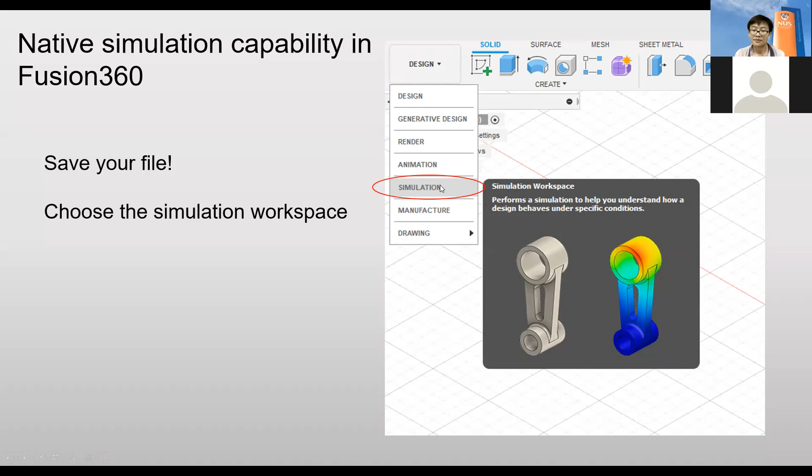And what study should we pick? Okay, static stress, which is the first one that comes up, is the most simple one. Like I said just now, if I take this pen and I were to compress it along the z-axis, I'm exposing it to static stress. And you can run this kind of simulation to see whether your material will fail or not. But for our case, we are doing something like an egg drop. So egg drops are not static, they are dynamic. It's like an impact. So we want to do an impact test. So for this challenge, the more suitable one would be event simulation.

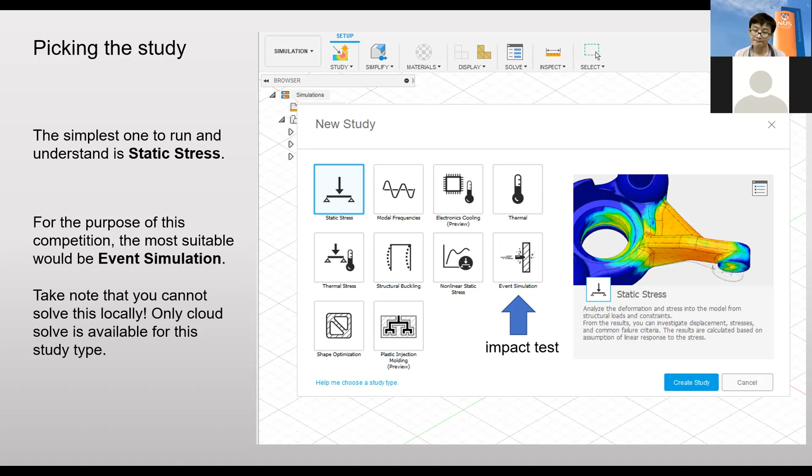However, I would like to tell you that you cannot solve the impact test locally. You can do cloud solve for free, but you cannot solve it on your computer. Later, I will show you what I mean. So the basic simulation workflow in Fusion is very simple. It's basically A, B, C, D, E, 5 steps. First of all, once you go into your simulation workspace, you'll see these buttons. Just follow it in sequence.

First of all, simplify. Is your model very complex? Are there unnecessary details? If there are, you can remove them. What is your model made of? So you can decide what material your model should be. Is it plastic? In this case, yes. What kind of plastic? Or maybe in the industry, they use steel, titanium, aluminum, or whatever, right?

What constraints? So when I do my simulation, which parts are fixed? Which parts are not supposed to move? And of course, if I impose my load, which parts are supposed to move? And if I'm doing an impact test, definitely I must have 2 parts, right? One to hit the other. So which parts will touch or are touching at the start of the simulation. So these are just the 5 key considerations.

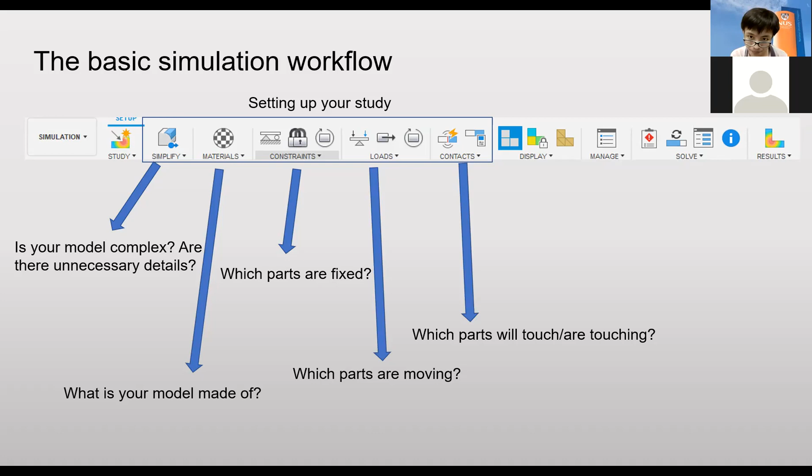And after you set everything up, you need to prepare to set up the solution. Okay, click Manage, which is this box here, and you'll see that there are 4 things for you to look at. There is General, Mesh, Damping, and Output. In this case, we can ignore damping.

Okay, let's look at General. The most important thing you need to look at is how long you will simulate, total event duration, and the number of result intervals. The more intervals you have, the more clearly you can see what's happening in the event. If I'm starting out too far, let's say I put my egg 1 cm away from the ground, in 0.001 seconds, it will not even touch the ground.

So the event duration needs to be properly set up. How long should it be? But it shouldn't be too long. The longer it is, the longer it takes to solve. Then there is the mesh. What size mesh should I have? Okay, if I have an egg, and if I only used 1 element to represent the egg, how accurate is this? But if I use 1,000 elements to represent my egg, is it too fine? Do I need that resolution? It's up to you to decide.

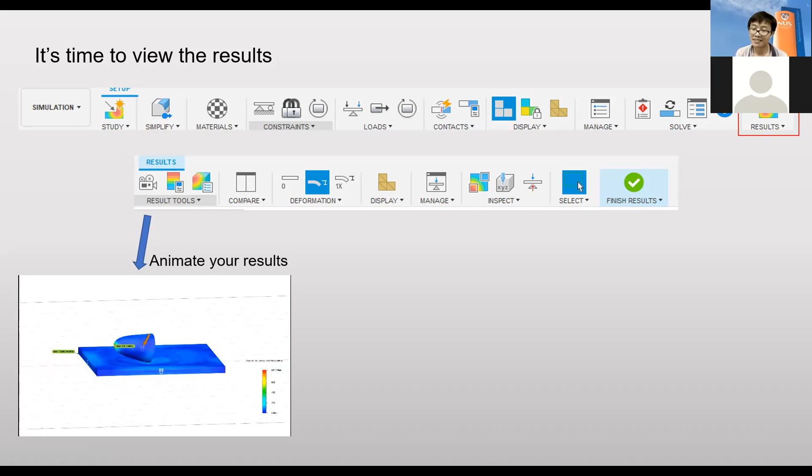So the most interesting one maybe is the first one, the animate button. You can always animate your results. In this case, I've animated an example. If I play it, you can see that it is a bullet-shaped object made of titanium impacting an aluminum sheet that has been deformed by it. But it's not just a cartoon that we are trying to make. We want to see the stress, the maximum force, the maximum deformation, and we can see all this by inspecting our model. All these tools will help you take a better look at what's actually happening in your model.

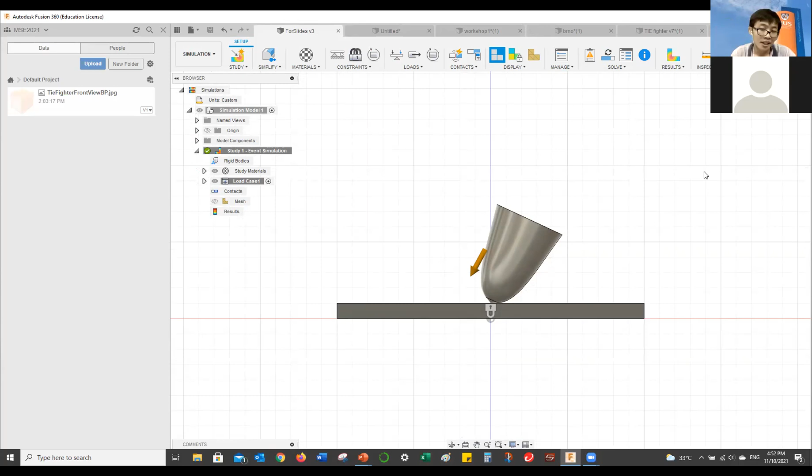So let me just go to Fusion 360. You can see this is my model simulation. I would like to tell you also, this is very important. If you simulate an event, you can give it an initial velocity. Okay, initial linear velocity, which is what I gave this object. But you realize that it's not touching. Okay, but it's very, very close.

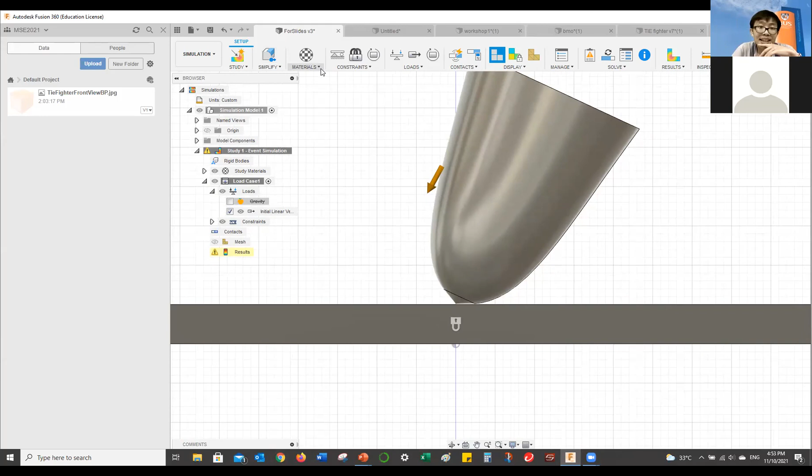The closer your object is to the surface it's going to impact, the faster the impact will start. If your object is too far away, it will take too long to compute. So you have to start very close to the surface. This is important. For this case, I don't have to simplify my model. It's already very simple. For my materials, I can click materials, and you can see that I have already set the materials here. My plate is made of low strength aluminum, and my projectile is titanium.

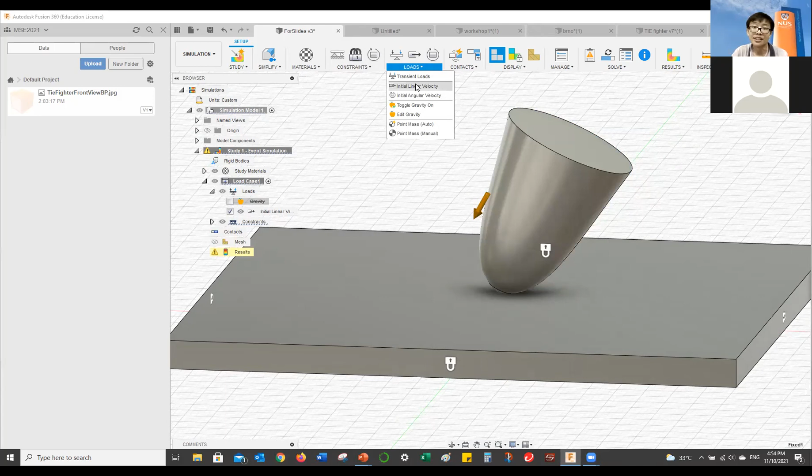Okay. My constraints, you can see a lock button here. So I have constrained the 4 sides, 1, 2, 3, 4 sides of this plate to be fixed, so they are not supposed to move. And I've given a load to my projectile, an initial linear velocity. I can select the angle. You can see that there's an angle I can select. And by selecting the angle, you will change your simulation.

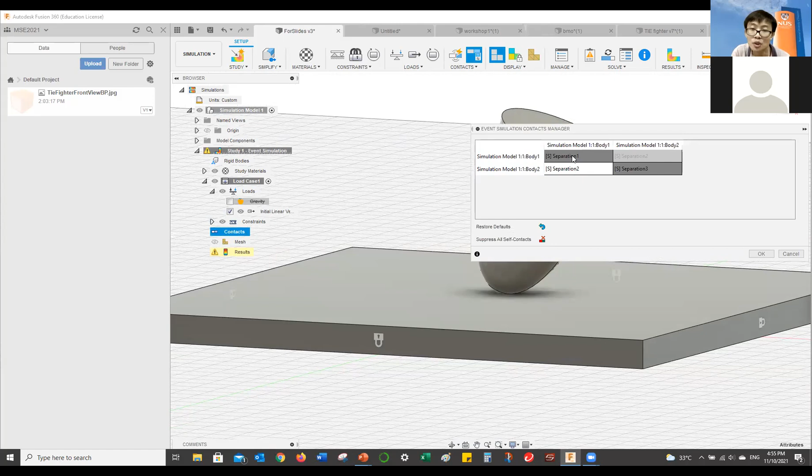So think about how your part is going to hit the floor. Is it going to hit it in a certain way, or might it fall in a different way? It is up to you to think about. Contacts. You need to make sure that you generate your contacts. You can use global contacts, or just generate contacts. If your model is fine, it should normally auto-generate. You can always check it. So I click here, contacts. I can see that between my two bodies, body 1 and body 2, there is a separation contact.

And then after I'm done, I can just go to Manage and set my settings. Click OK. Click Solve. Take note that you cannot solve this locally. But for an education account for Fusion 360, solving on the cloud is free. So it doesn't even use your computer resources. It just sends it to the Autodesk server. But you cannot control how long it might take. Credits are free for students. So just click solve, and it will tell you how it's going. Then once you're done, click results.

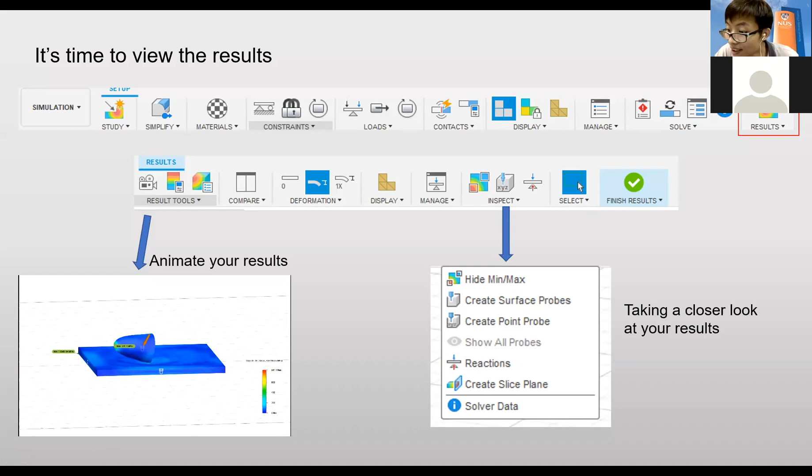That's because I changed it. Okay, so because I've changed the settings for the velocity, that's why now I have to recompute the results. But the results will be the same as what I'm showing here. Okay, and you can just use all these tools to take a look at the results. And that's basically it. Okay, so with that, I've come to the end of my part of the lecture.

And I'd like to just tell everyone that this is not really a competition. Okay, we want this to be a conversation. So if there's anything that you want to try, be bold, but if you are not sure how to do it, feel free to ask us. Okay, we're not helping you with your model, but we can help you to learn. And when you learn, you can make a better model. And also, maybe we can also learn along as well.